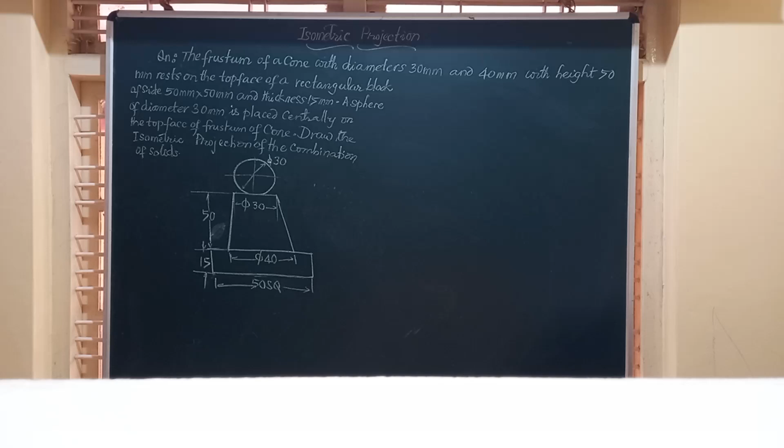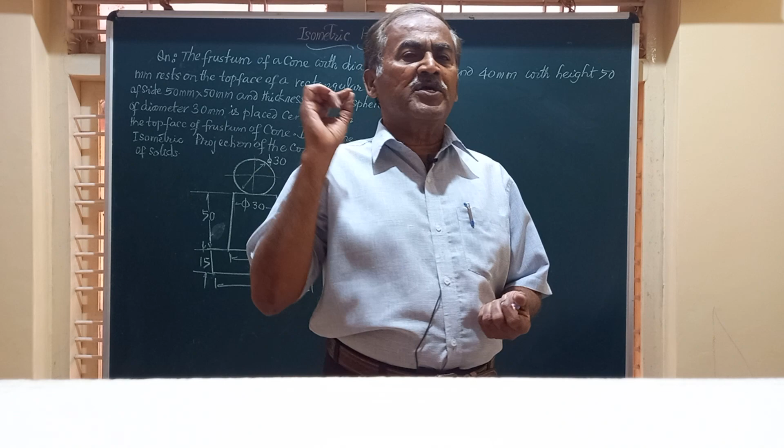And friends, in this video, we are going to work out a problem wherein the problem for the isometric projection is given in terms of a statement. Let's see what the question is there in store for today's video. The question reads like this.

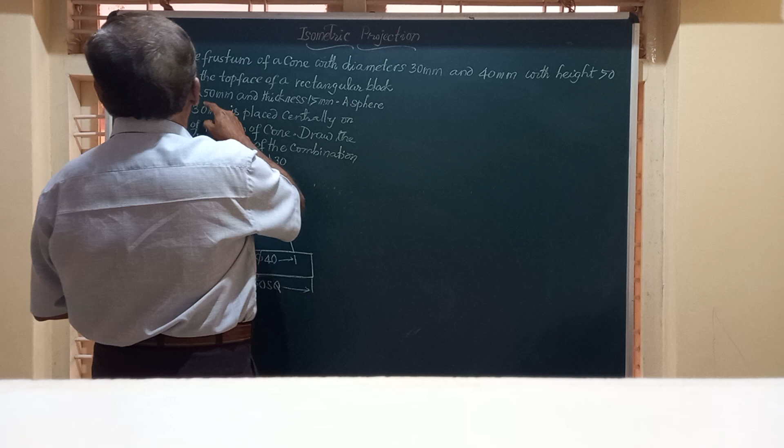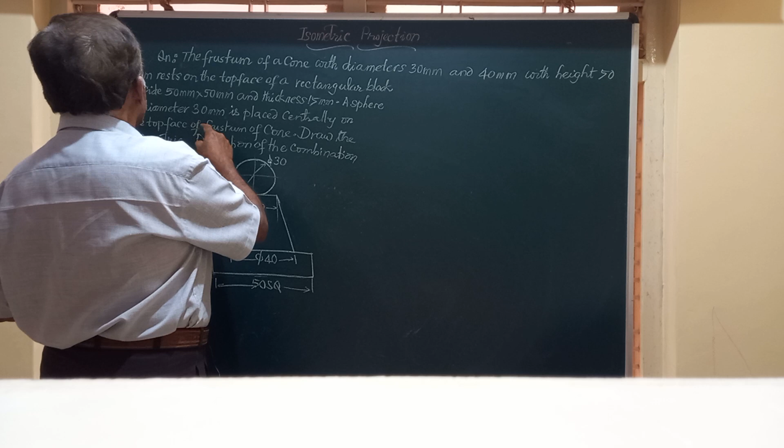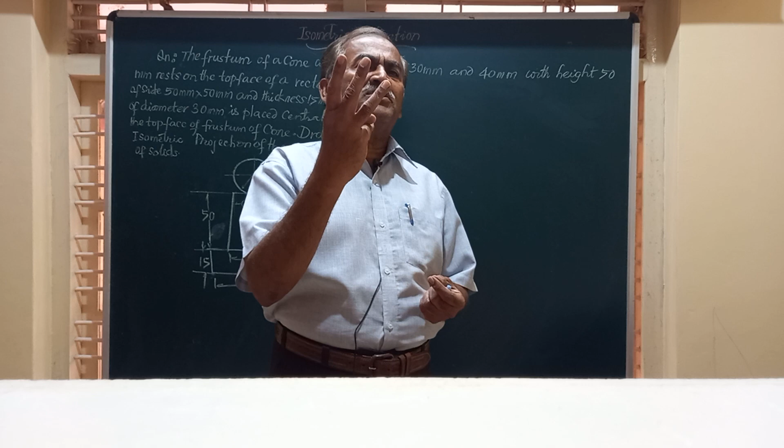The frustum of a cone with diameters 30 and 40 with height of 50 rests on the top surface of a rectangular block of dimensions given. A sphere is placed on the 30 diameter centrally on the top surface of the frustum of a cone. So basically, friends, there are three different objects which are placed one over the other.

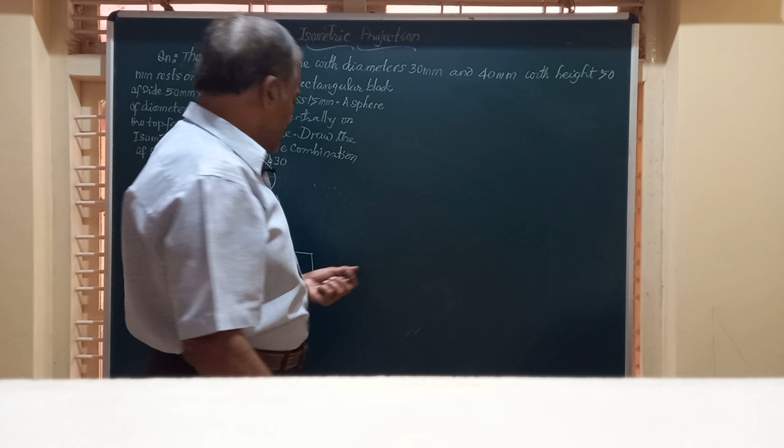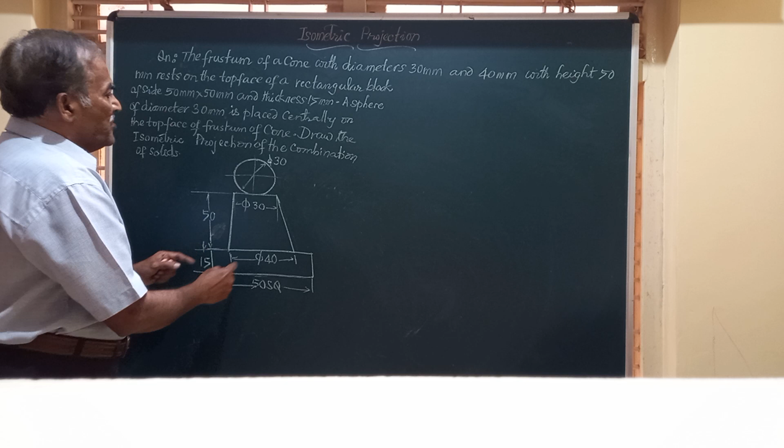First of all, we have at the bottommost a rectangular block, or a square block to say, having dimension 50 by 50. So there is a block here 50 by 50; I have written 50 SQ. SQ indicates square, and it has got a thickness of 15. On the top of this block is placed what is called a frustum of a cone. So the cone is the second part.

The frustum of a cone: whenever a cone is cut by a section plane parallel to the base and perpendicular to the axis, the portion below the section plane that is retained is called a frustum of a cone. It has got a diameter 30 at the top, 40 at the bottom, and height equal to 50.

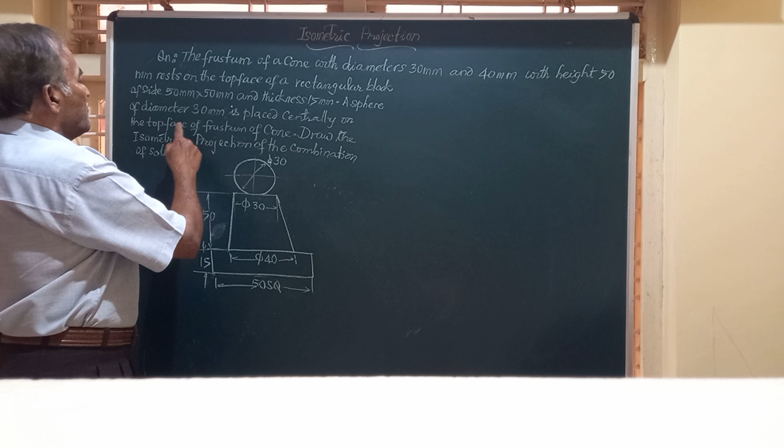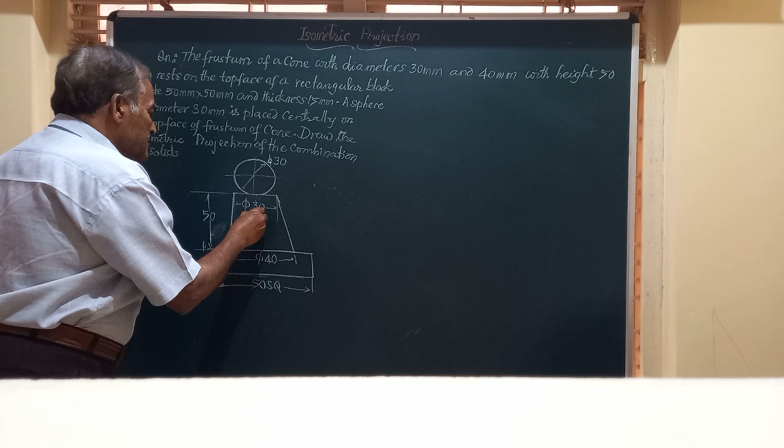And above this top surface of the frustum of cone, we have a sphere of diameter 30 placed centrally over that. That is to say, the axes of all of these fall on the same line. So in this we are going to learn how to draw the isometric projection of a square block, the frustum of a cone and that of a sphere. All three are there in this particular problem.

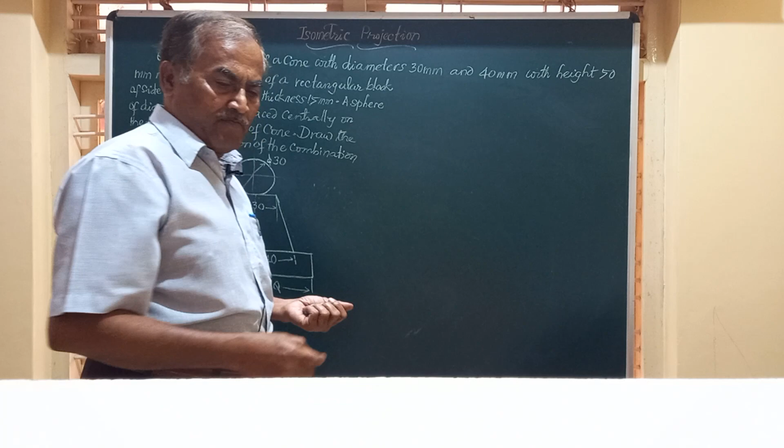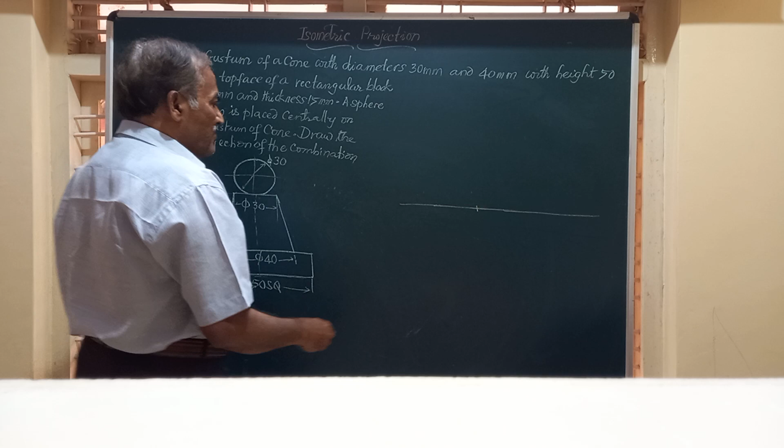Friends, let me start this projection by drawing a reference line, and let's start with the marking of the block 50 by 50. So friends, I am going to draw two lines of length equal to 50 and 50 height. So I am going to have a block here. This is 50 by 50. Since it is at an angle of 30 degrees and it is a square, let's take 50 first of all.

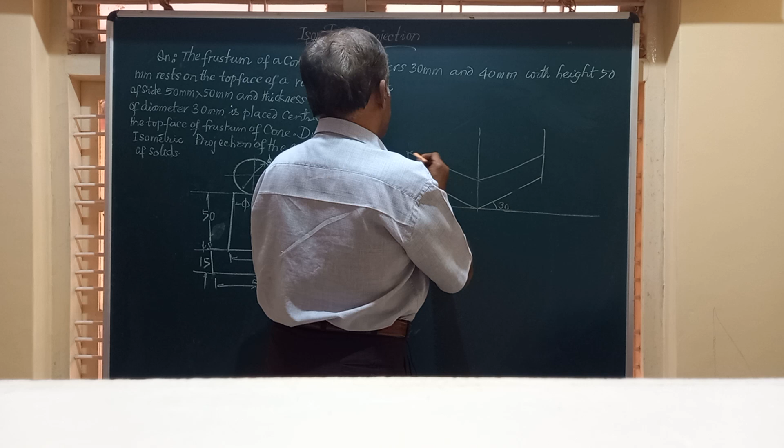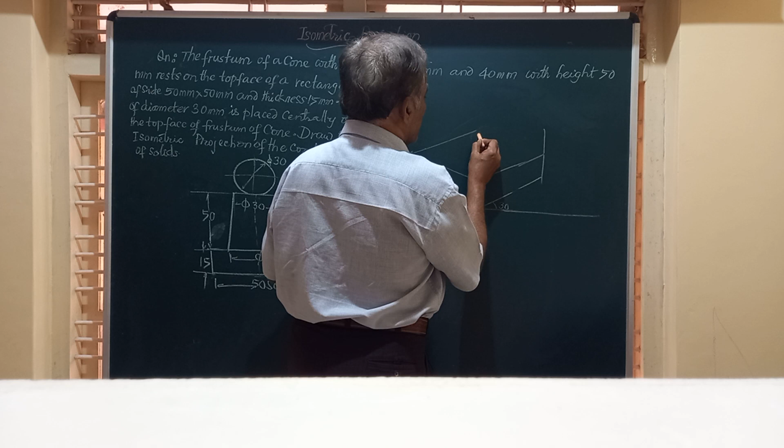So 50 from here, 50 on this side, and again 50 here. This will intersect at this. Parallel to this edge, right on the line parallel to that, it has to intersect here. And finally, friends, you are going to have this another line drawn parallel to this. So these lines are parallel to each other.

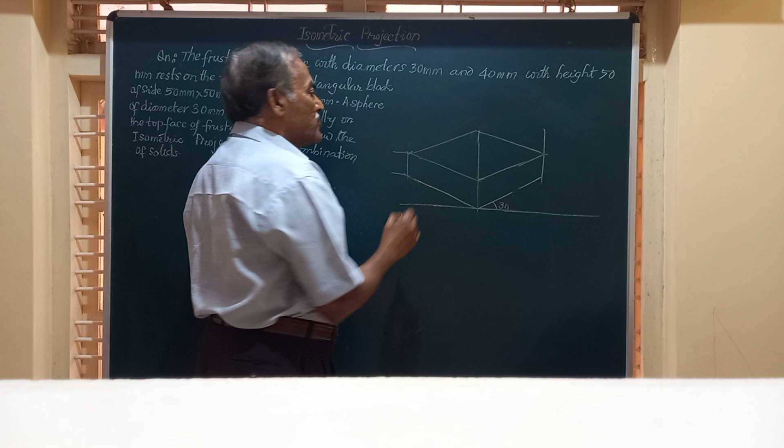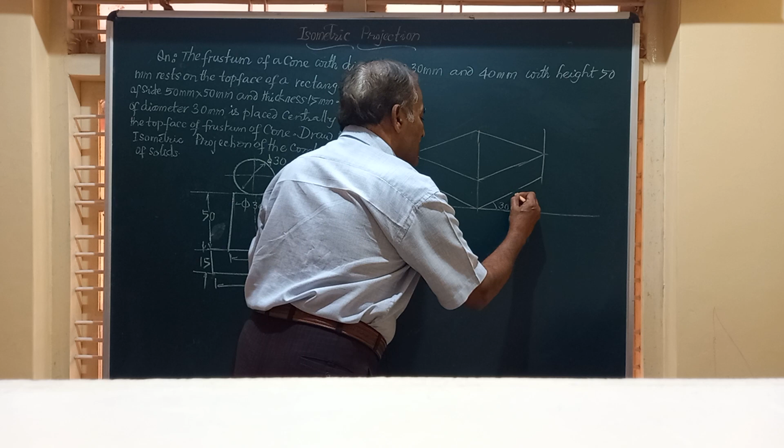And friends, since it is the isometric projection, whatever dimension you use to construct this figure should have isometric length. So there is a length of 50 millimeter here, and I will say it is iso 50. That is to say, whatever the dimension 50 is, that is to be multiplied by 0.816. Similarly, this also we have got iso 50.

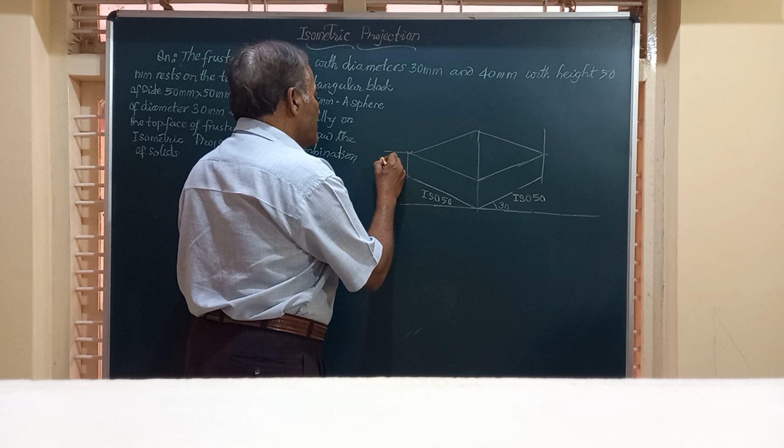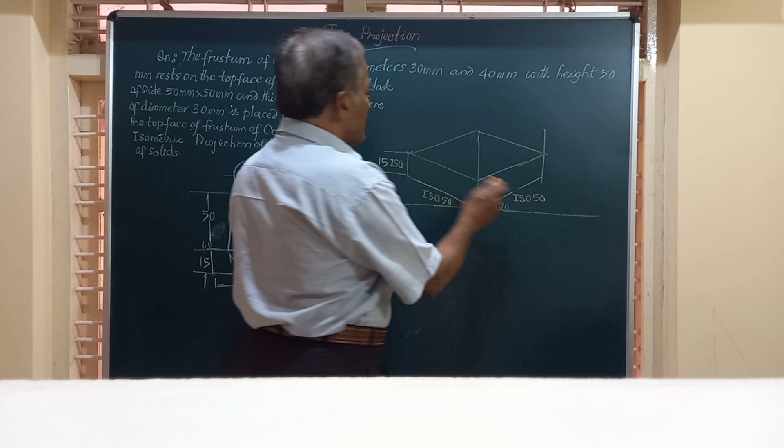This height is 15 they have given here. Again, that should be iso 15. So when I say iso 15, whatever length you have got has to be multiplied by 0.816. Friends, you have got this square block here. This represents the isometric projection of the block.

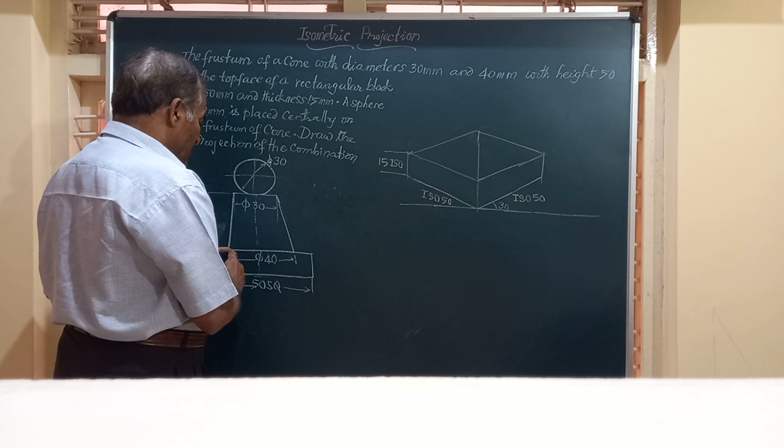On that, friends, you have got a frustum of a cone. It has got a circular bottom and circular top. At the bottom side, it will have a diameter equal to 40. This is 50 and this is 40, friends. So I will leave 10 mm on all the sides.

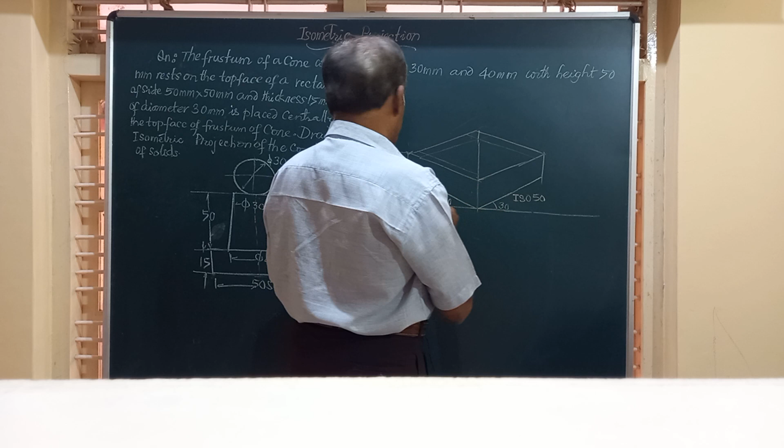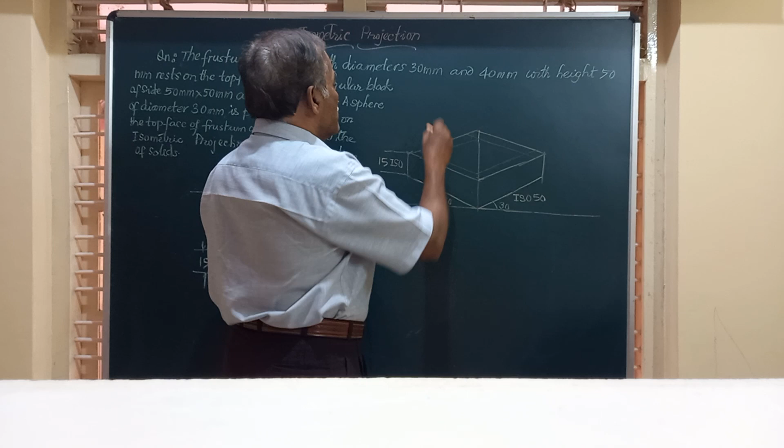That is not 10, it is 5 millimeter, because 50 minus 40 is 10. So this gap I am leaving here is equal to 5 millimeter, on all the ends. And friends, again, we will take that height of 50 millimeter ISO from all these points. So 50 ISO from here, 50 ISO; all these lines are isometric lines. One from here, one from here, one from this face.

This is another height of 50 millimeter. And there, friends, if you draw these lines parallel to this base again, like what we have done, a line parallel here, 50 ISO, parallel to this, then parallel to this line, again parallel here, 1, 2, 3, and this you have to join here, that's all.

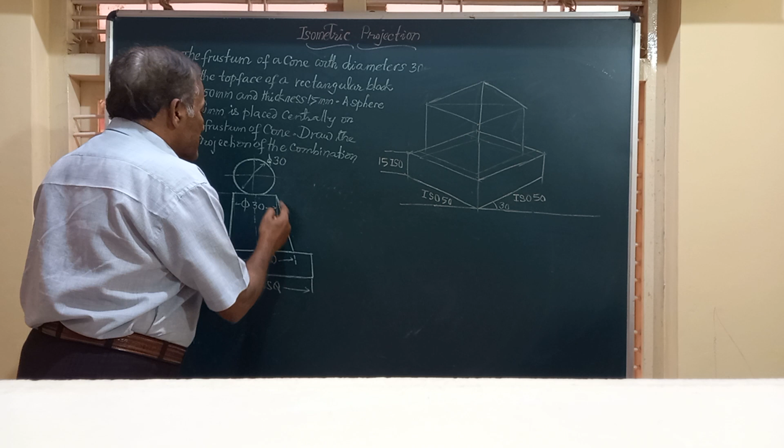So we are going to have all these vertical lines drawn through the height of 50 millimeter ISO, and we will join them like this. Friends, you have got here, and all this we are joining by parallel lines, parallel to the edges. Friends, at the top end it has got a diameter of 30 millimeter.

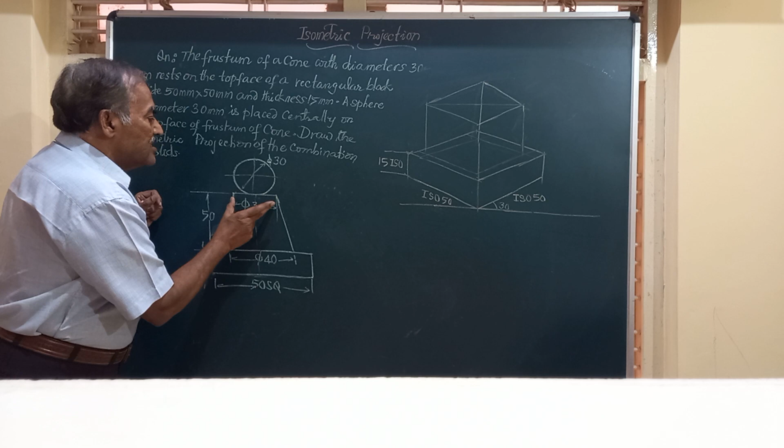So friends, here you have this, and by using 4 center method, one of the easiest methods used to draw the ellipse, saving a lot of time. And here friends, I am going to construct an ellipse, that is the top end of that frustum of a cone. So what is the procedure, friend?

You have to take this as the center, one of the corners, join this to the opposite side corner. So you will have a point here. Similarly, join this corner to the opposite side, center here. Friends, you will get 2 points. This is center 1. With center 1 and radius equal to this much, you can draw an arc. And similarly here, this as center, this length as radius, another arc.

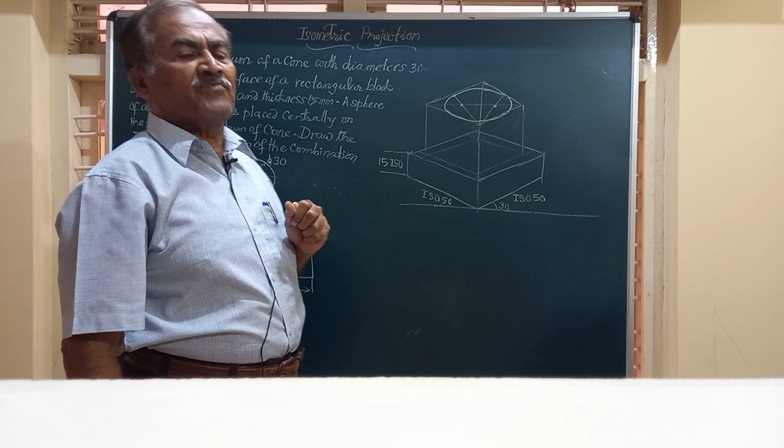This is center C3, and this distance as radius, another arc. This is center 4 with the same radius, another arc. So friends, we have drawn 4 arcs by taking center C1, C2, C3 and C4. This is the construction followed to construct an ellipse, that is by 4 center method.

Similarly friends, for the bottom face, you have got 40 dia. So this box is having 40 dia. We follow the same procedure. See, we'll join this to the opposite side center, and it will meet somewhere here. So friends, this is our center C1 for this. With center C1 and radius equal to this much, an arc we draw.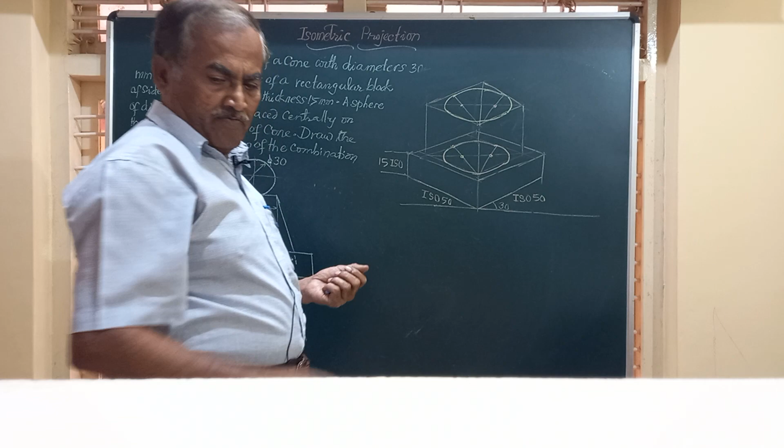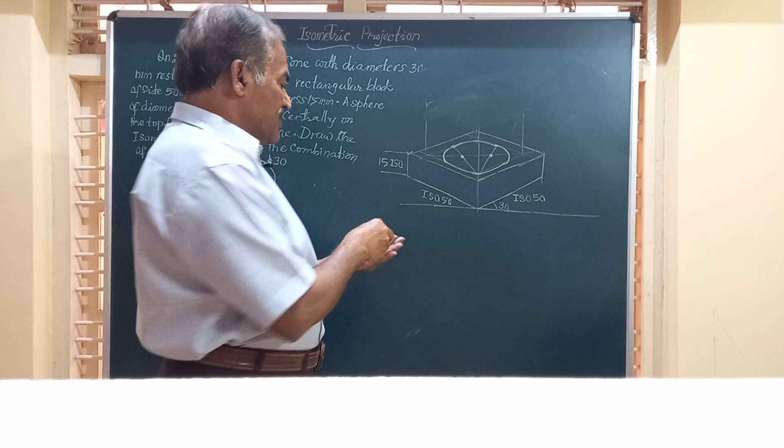Here we should have taken 10 millimeter less. So I will have a small change here, friends. Because this has got a diameter of how much? 30 mm. So we have made it 40. This should be 30. You construct. So friends, what do we do here? This is a line here, line from this parallel to that, line parallel to this, and line parallel to that.

This has got a dimension of, friends, 40 by 40, but we should have a smaller surface, that is an ellipse having 30 mm diameter. So using 4 center method, friends, I am going to construct an ellipse here, and then arc like this. So this has got the 4 centers, center C1, radius this much, an arc similar to what we have done here. We have drawn there, friends.

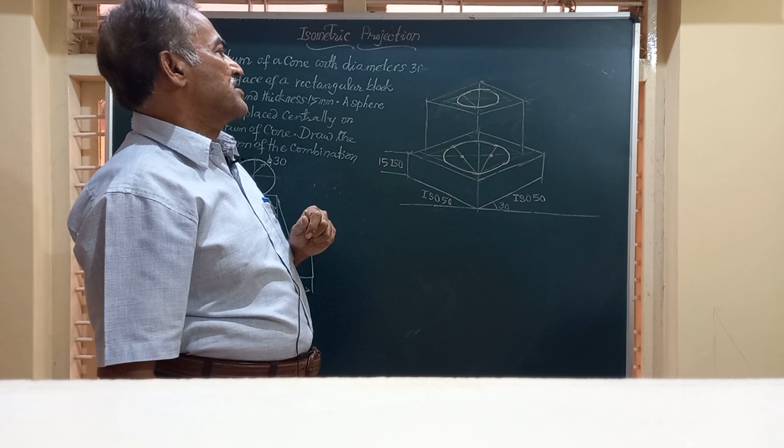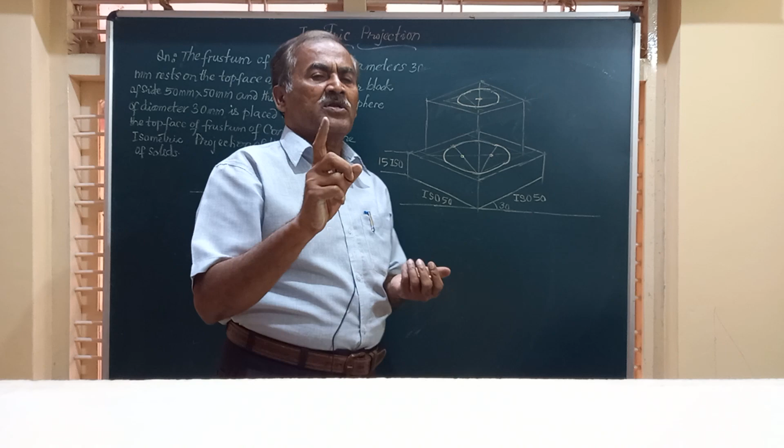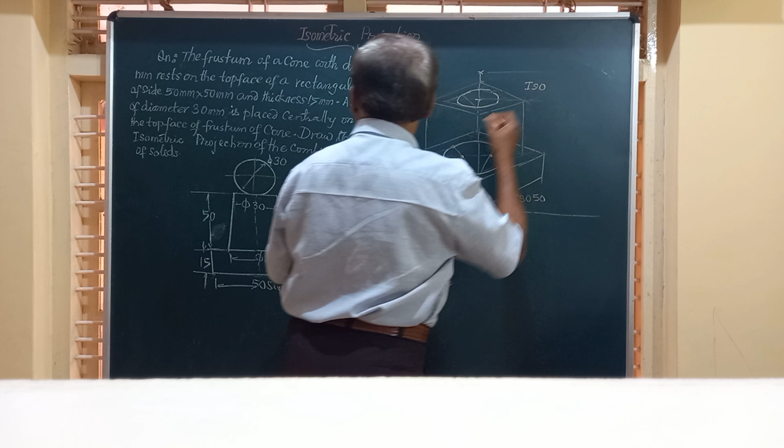Above this, we have got a sphere of diameter 30 mm. So what is to be done, friends? Only in the case of spheres, we should take the isometric radius as the height. So from here, friends, I will take this height equal to the iso radius. What is the radius of that? Diameter is 30. ISO 15 radius, means 15 millimeter radius, and with this as the center and radius equal

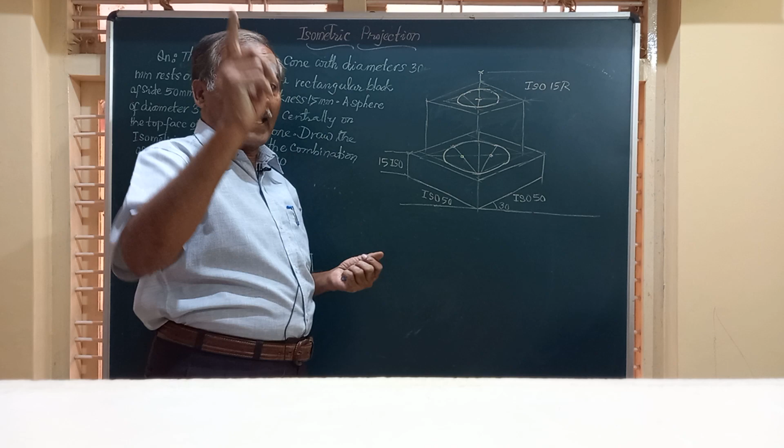to the actual radius. Once again I am repeating, friends, in case of all spheres in the isometric projection, you have to take the isometric height from the center. After obtaining the center C, we have to take the actual radius, and we have to complete or draw a circle through it.

Friends, this is how the circle will look. Suppose this is ISO 15 radius. Friends, this is how this sphere looks. Now friends, we have joined all this.

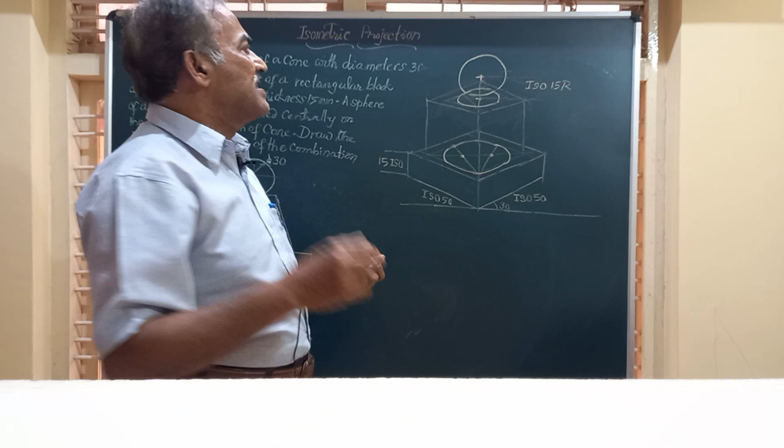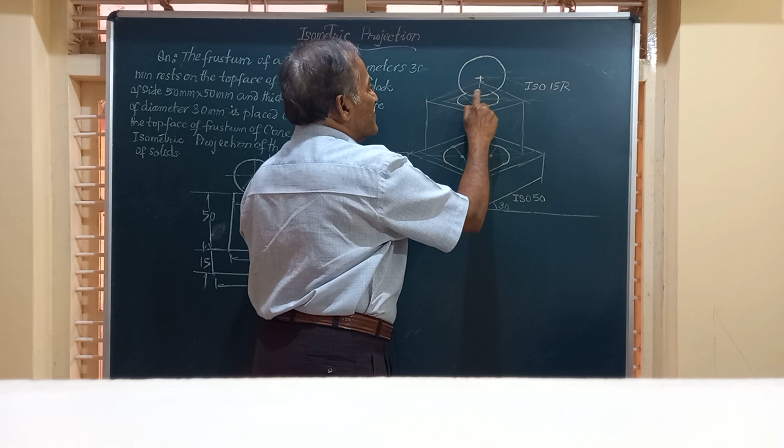Now let us complete the final figure by removing the unwanted line. Friends, when you see here, this sphere is covering this portion of the top face of the frustum of cone. So I have removed it. And similarly here, friends, we have got the top face of the frustum and the bottom face of the frustum. We have to draw a line tangential to this, a line tangential like this, and another line tangential to this.

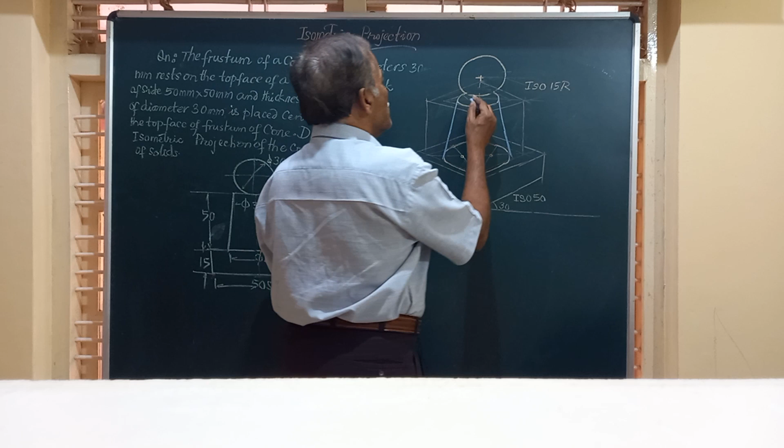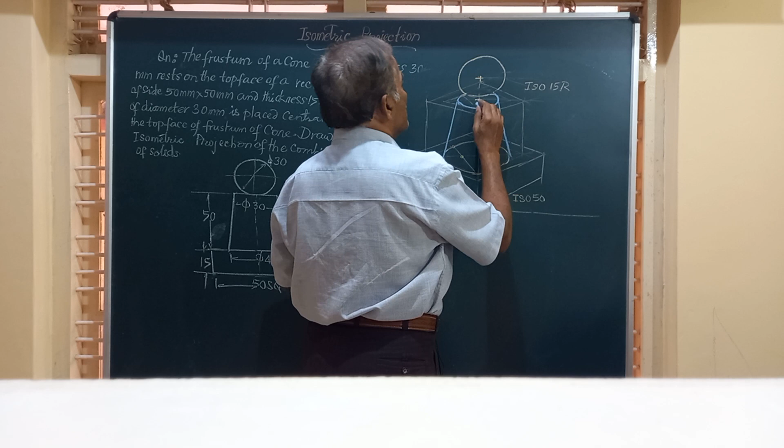So friends, you have got these surfaces. Let me show this top face by a dark line. So some portion is behind that. Now friends, similarly here we can complete this part. This is the portion that is visible to you, that is in front. So we'll be able to see the front, so I have shown that by a full curve.

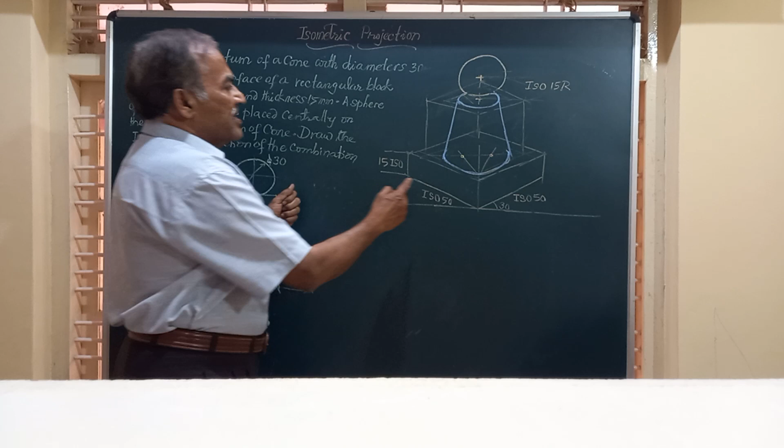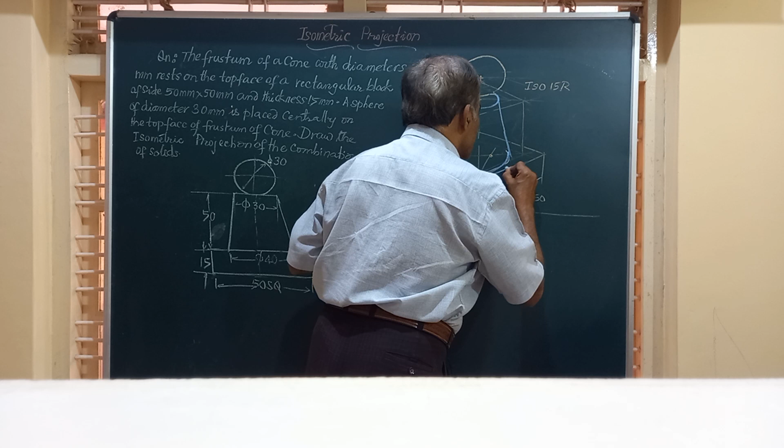Whereas the portion behind it, this part, I am going to remove so that you will have a clear picture of the solid. Finally, friends, the bottom face you have got, that is the bottom block, a square block. So all these edges are visible. So show a visible line or a full line. This line, full line. This up to here is a full line because the bottom portion is not visible. So this vertical line is a full line. All these three are full lines.

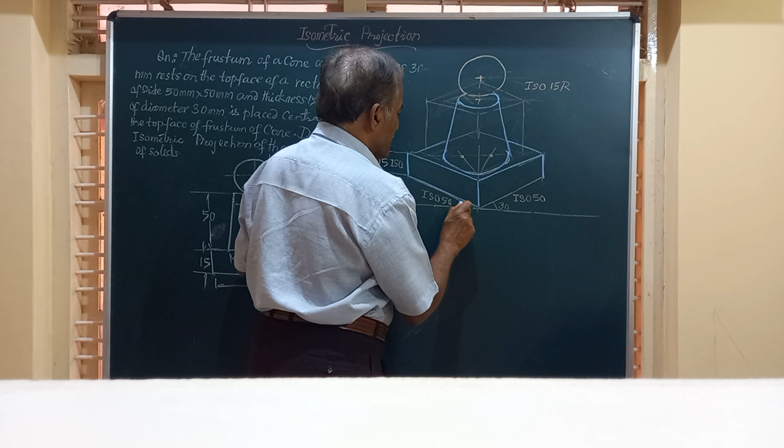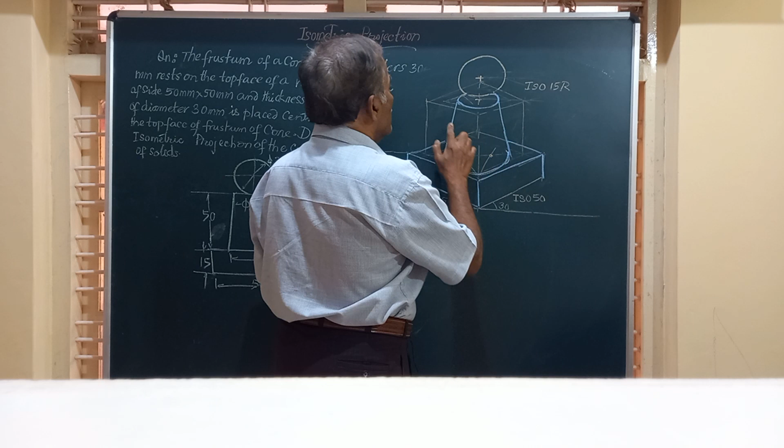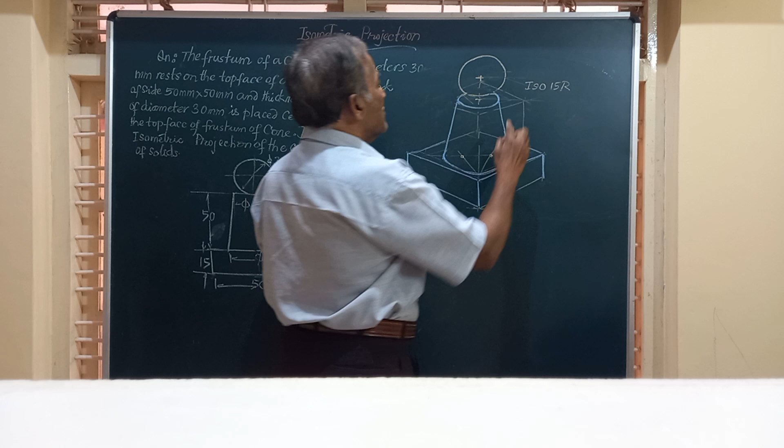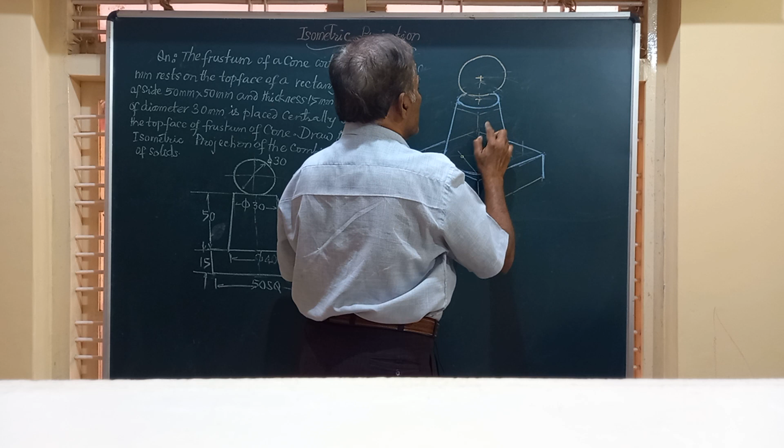And friends, here you can see we have completed this, and to see that the drawing looks better, we have to remove all these construction lines only after completing the figure. And in isometric projection, generally no dimensions are shown, and no angles are also marked. So friends, you can simply have this portion retained like this, remove all these unwanted construction lines, remove this line, this is the construction line. This portion of the top is not visible.

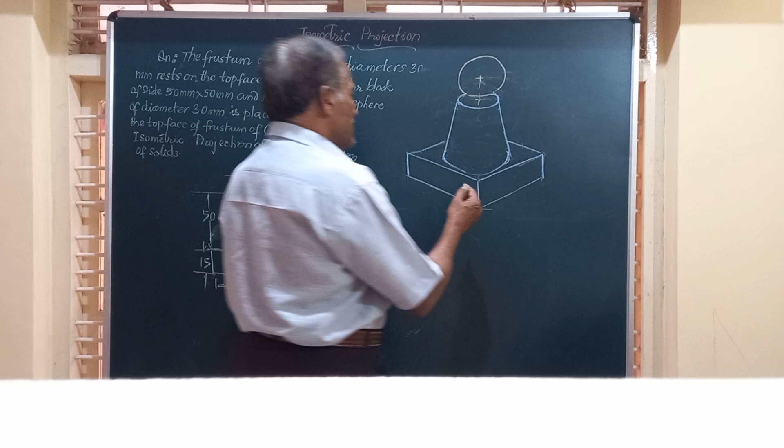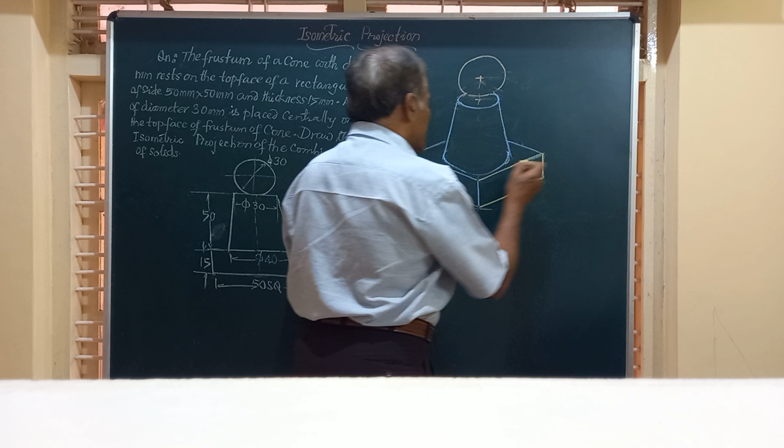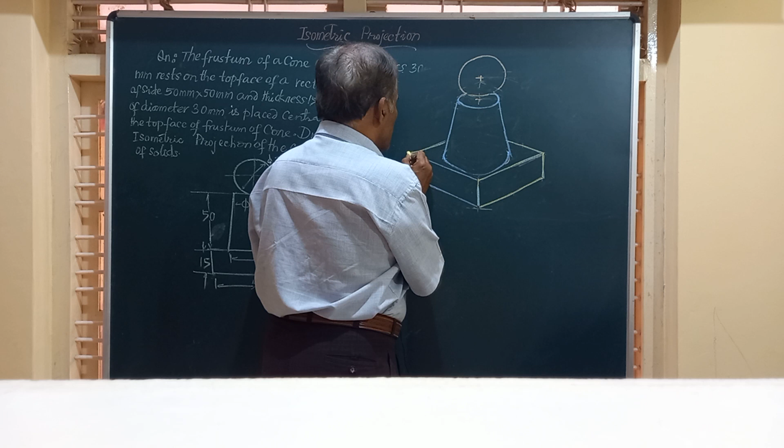And friends, before I complete this, let me give a final touch with visible lines to this projection. So friends, I will change this color and say this is a visible line. The thickness of 15 millimeter is visible. This line is visible. The top face of the block is visible. And here, friends, you have this.

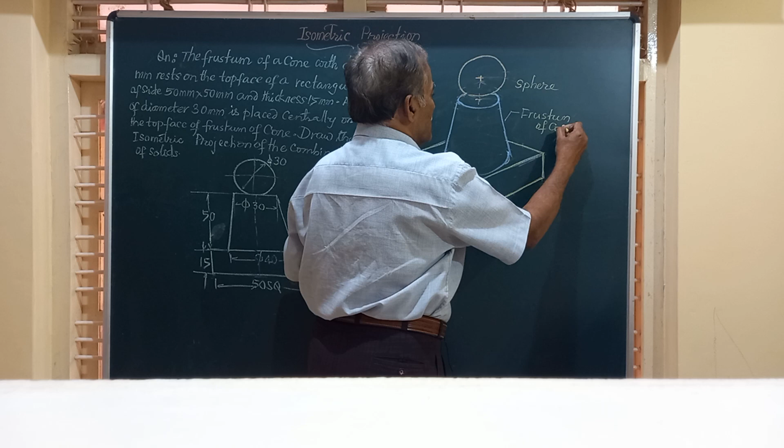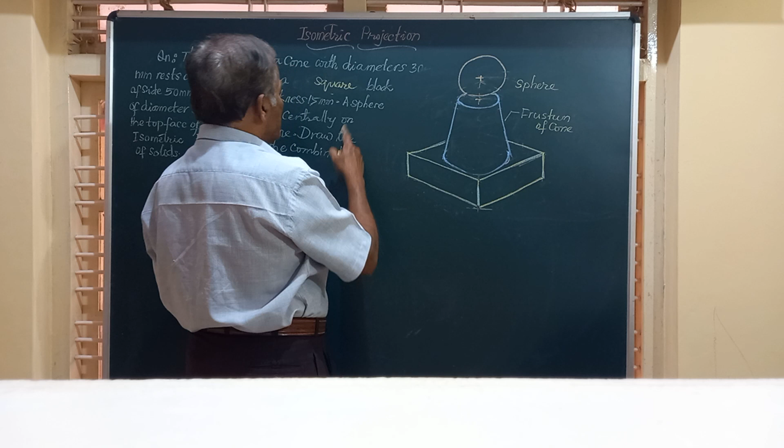So this is the sphere resting on the top face of the frustum of a cone. This is the frustum of cone, and this is a square block. It's not rectangular, it is a square block because the dimensions are the same, 50 mm by 50 mm, and it has got a height of 15 millimeters. Friends, let me show all these using the same color.

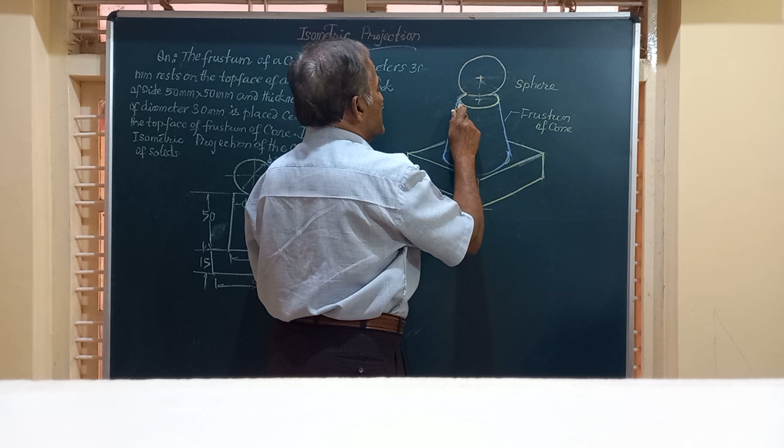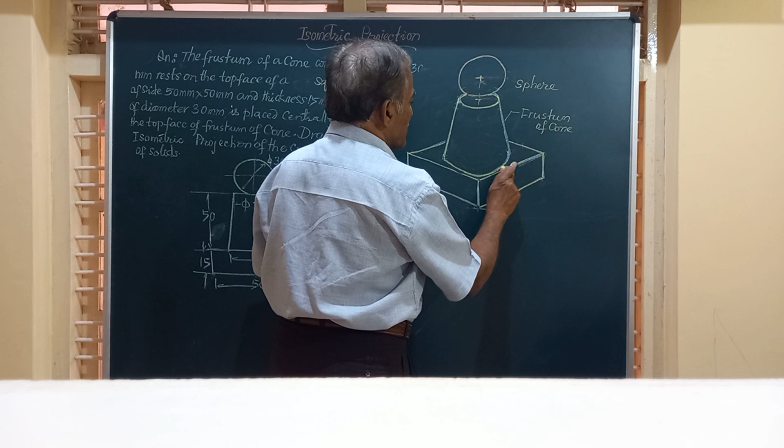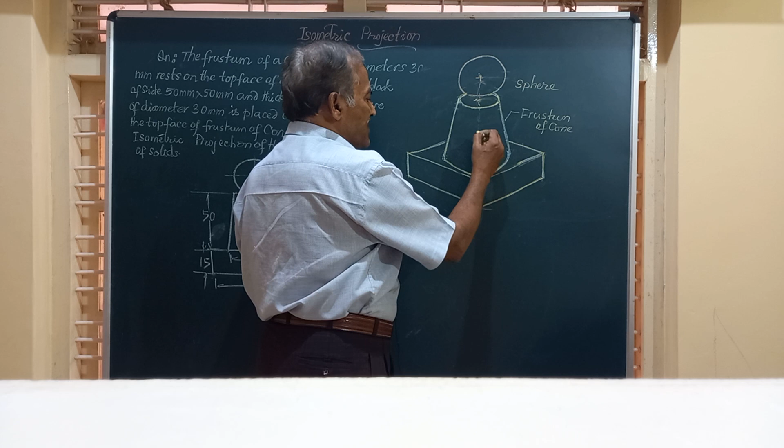So this is the top face of the frustum. This is one of the generators of that. And friends, this is how the projection of this block will look. Friends, you should also remember the axes will all fall on the same line. That is, the center of the circle, the center of this ellipse, the center of this ellipse, and the mid height of this block all will fall on the same line.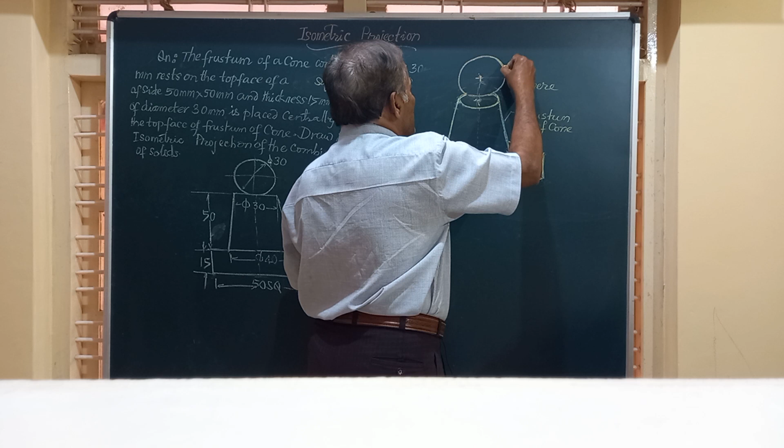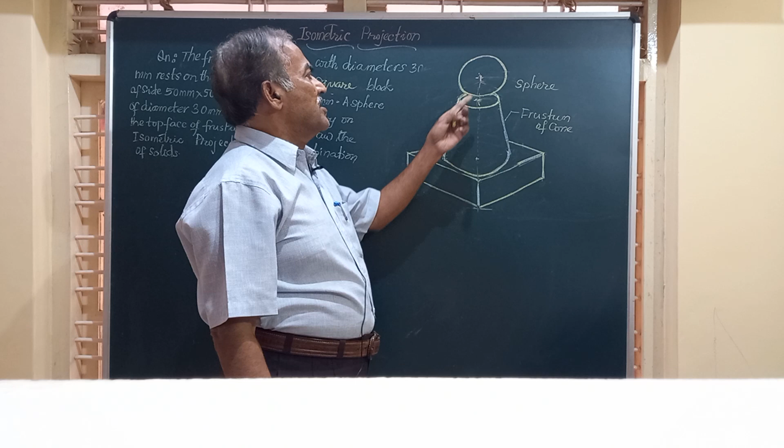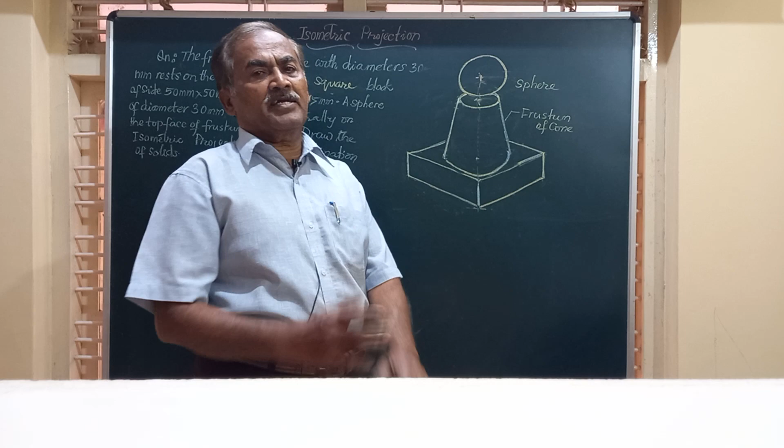And friends, I am very sure that you have followed the procedure to construct the isometric projection of the combination of solids, wherein you have got a sphere placed on the top surface of the frustum of a cone, which in turn is placed centrally on the top face of a square block of 50 millimeter side and 15 millimeter thickness. Friends, by understanding this clearly, you have learnt how to draw the isometric projection of a square block, a frustum of a cone, and then a sphere.

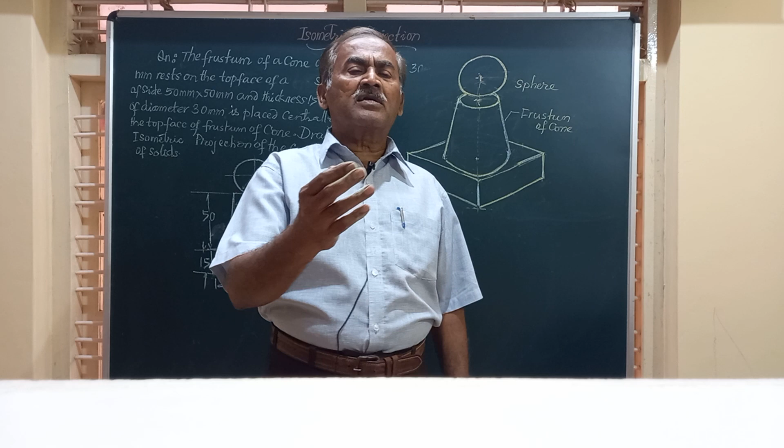Friends, please go through the complete video. Make the drawing following the procedure I have told you using the actual isometric scale on a sheet of drawing paper.